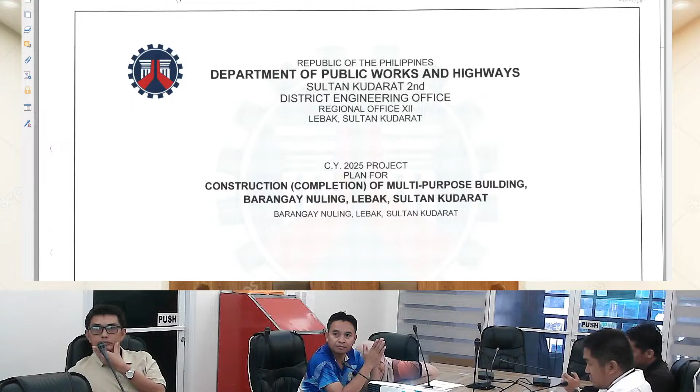First, we have here 25MH0069, with contract name construction completion of multi-purpose building, Barangay Christianuevo, Lebak, Sultan Kudarat, with an ABC of 2,475,000 and duration of 90 calendar days. This project is intended for the SK building of Barangay Christianuevo, a one-story building.

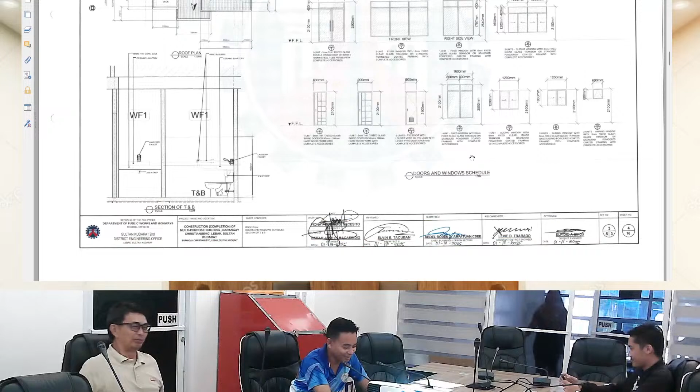As you can see, this is the perspective of our building and its location map. Next, we have here the floor plan, elevations - front, rear, left, and right. We also have the longitudinal section and the cross section through X and Y. Next, we have the roof plan, the detail of our toilet and bath, and the doors and window schedules.

Next, we have here the general construction notes for our guidelines during construction. Next, we have the foundation plan, the detail of our footing to column, wall footing details, beam schedules, roof beam plan, as well as the roof framing plan.

Next, we have here the detail or typical detail of our roof beam, the connections of the roof and column, beam and column, the typical section of beams, detail of concrete seating, detail of splice, canopy, and detail of our stair on fill.

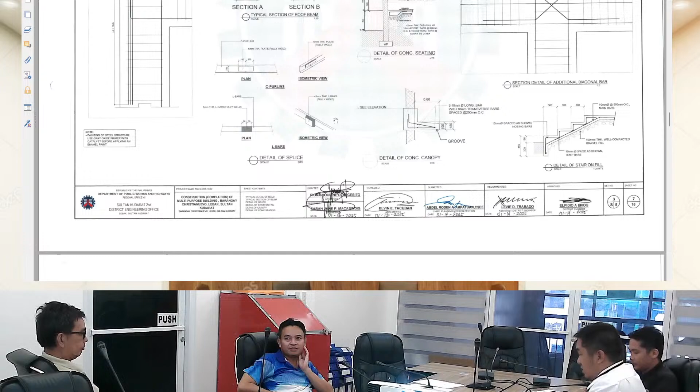Next, we have the detail for our rafter, for our roofing, the typical detail of our slabs, here with its reinforcing steel bar schedules. Next, we have here the detail for our concrete letter signage, which should be anchored to the wall of the building or structures.

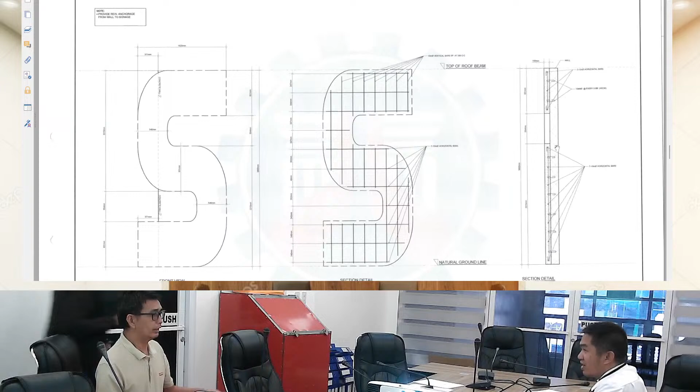Next, we have here for plumbing: the water line layout, sanitary line layout, and waste line layout with its isometric view. Next, we have here the detail of our septic vault and the proper connections of our pipings together with its specifications and legends.

Next, we have here for our electrical: the power and the lighting layout plan, the panel board diagram, electrical riser and load schedules. Next, we have here the detail of our fire extinguishers, the typical detail of our panel board for reference, and the typical detail for our lights and outlets.

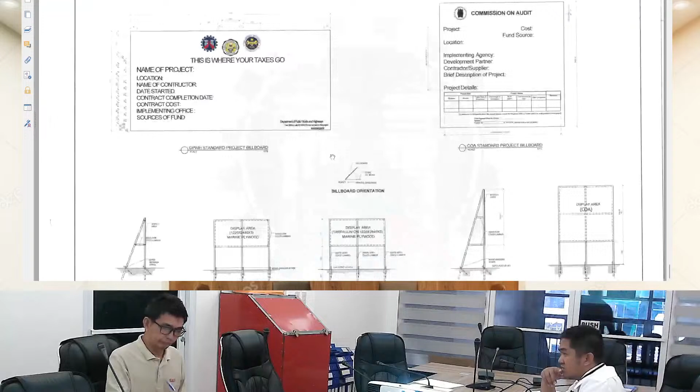Next, we have here the geohazard map. And lastly, we have here the standard project billboard.

The second project is 25MH0074, construction completion of multipurpose building, Barangay Nuling, Lebak, Sultan Kudarat, with an ABC of 2,970,000 and duration of 90 calendar days.

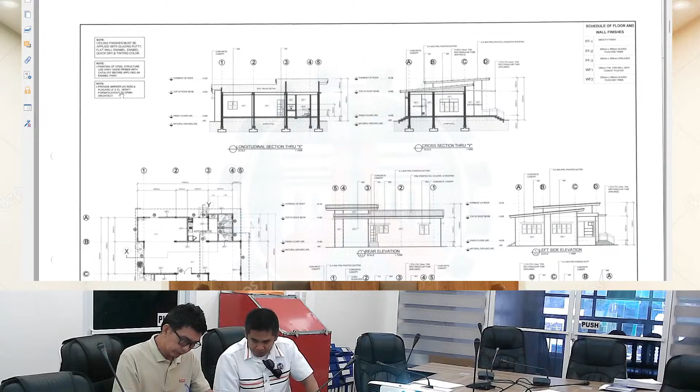This project is intended for the senior citizens, but the structure is the same as the structure of Barangay Christianuevo which I discussed earlier. The difference is the contract amount, and this project includes the painting of the ceiling. Here, it is the same detail as I discussed earlier.

For the summary of quantities for this project, we have the provision of field office for engineers, 3 months; permits and clearances, 1 lump sum; project billboard/signboard, 1 each; occupational safety and health, 1 lump sum; mobilization, demobilization, 1 lump sum; structure excavation, common soil, 33.48 cubic meter.

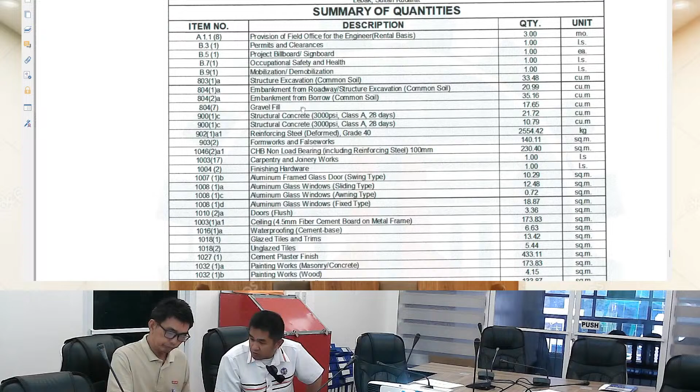Embankment from roadways/structure excavation, common soil, 20.99 cubic meter; embankment from borrow, common soil, 35.16 cubic meter; gravel fill, 17.65 cubic meter; structural concrete, 21.72 cubic meter and 10.79 cubic meter.

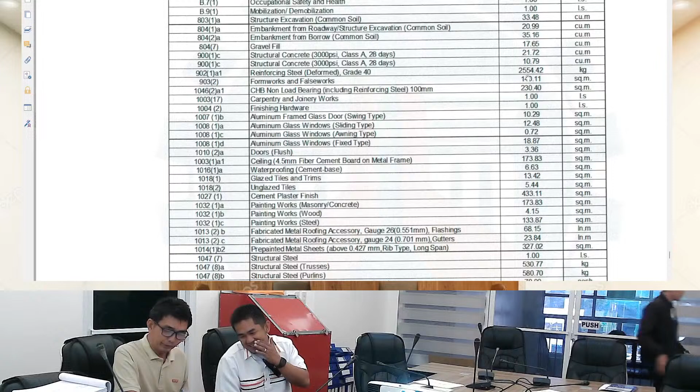Reinforcing steel deformed bars, grade 40, 2,554.42 kilogram. Forms and falsework, 140.11 square meter. CHB non-load bearing, including reinforcing steel, 100mm, 230.40 square meter. Carpentry and joinery works, 1 lump sum.

Finishing hardware, 1 lump sum. Aluminum frame glass door, swing type, 10.29 square meter; sliding type, 12.48 square meter; awning type, 0.72 square meter; and for fixed type, we have 18.87 square meter.

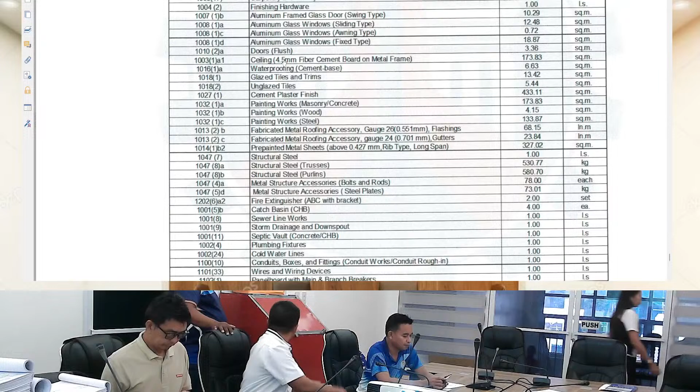We have also here door flush, 3.36 square meter. For ceiling, 173.83 square meter. Waterproofing cement base, 6.63 square meter.

Glazed tiles and trims, 13.42 square meter. Unglazed tiles for our comfort rooms, 5.44 square meter. Cement plaster finish for 433.11 square meter.

For painting works, masonry/concrete, 173.83 square meter. For wood, 4.15 square meter. For steel, 133.87 square meter.

For fabricated metal roofing accessories: flashing, 68.15 linear meter; for gutters, 23.84 linear meter; and for pre-painted metal sheets, rib type long span roofing,

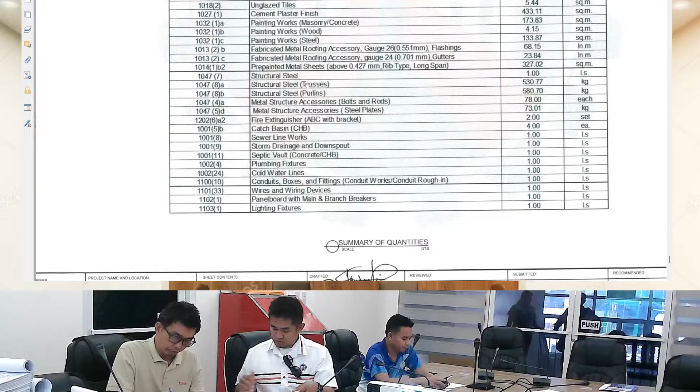327.02 square meter. For structural steel, 1 lump sum. For trusses, 530.77 kilogram. For structural steel purlins, 580.70 kilogram.

For metal structure accessories, bolts and rods, 78 each. Steel plates, 73.01 kilogram. And for fire extinguisher, 2 sets. Catch basins, 4 each. We have also here for plumbing and electrical: catch basins, sewer lines, storm and drainage, and

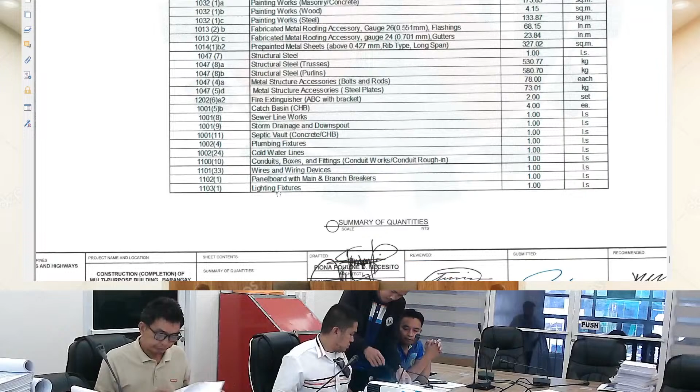downspout, septic vault, plumbing fixtures, cold water lines, conduits, boxes and fittings, wires and wiring devices, panel boards with main and branch breakers, and lastly, lighting fixtures.

Next, we have here the detail of our standard project billboards.

Okay, for our next project, 25 MH 0079, construction completion of multi-purpose building, Barangay Poloy-Poloy, Lebak, Sultan Kudarat, with an ABC of 2,970,000 with a duration of 90 calendar days.

This project is intended for the new barangay hall of Barangay Poloy-Poloy, but it is just phase 1, or for the ground floor only.

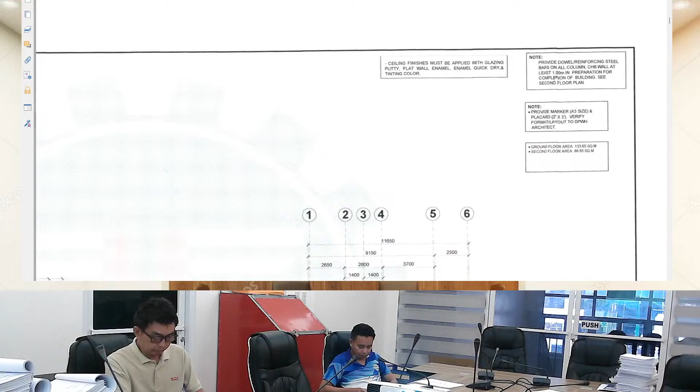Please take note that we have notes in our plans. For example, we have here: provide dowels or reinforcing steel bars on all columns, CHB wall, at least 1 meter, in preparation for the completion of the building. Please refer to the second floor plan for the preparation of the dowels here.

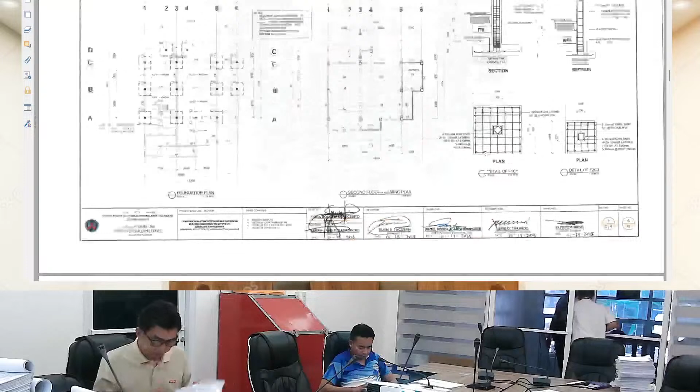Next, we have the foundation plan and the second floor framing plan, or the beam layout. And we have also here the detail of our footing to column, wall footing, and detail of our stair on fill, FTB, and schedule of our column.

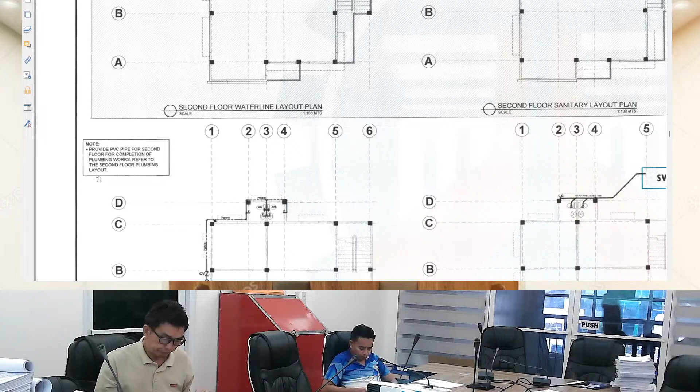And we have also here the second floor, which we need to provide a pipe for the completion of our building, for the second floor plumbing layout.

Next, we have here its isometric view and the detail of our septic vaults, together with the detail or connection of our pipings. Next, we have here for electrical, the ground floor power layout and lighting layout plan.

And we have also here, for second floor, which we need to provide UPVC pipe for second floor in completion, for the completion of the electrical works for the second floor, future expansion or future completion of the building.

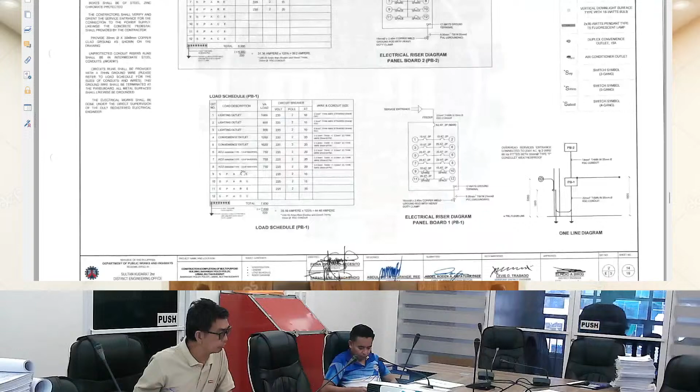Next, we have here the schedule of loads and its riser diagram, and the typical detail of panel boards and the outlet and lightings.

We also have here the layout plan for our fire extinguisher, with its details and schedules.

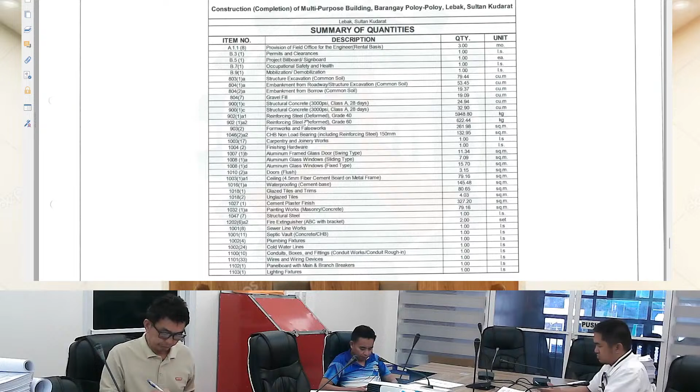Next, for the summary of quantities, we have the provision of field office, permits and clearances, project billboard and signboard, occupational safety and health, mobilization and demobilization, structure excavation for common soil, embankment from roadway/structure excavation, embankment from borrow, gravel fill, structural concrete, and reinforcing steel bars grade 40 and grade 60.

Formworks and falseworks, CHB non-load bearing including reinforcing steel 150mm, carpentry and joinery works, finishing hardwares, aluminum frame glass doors swing type, and aluminum glass windows sliding type and fixed type, flush door, ceiling, waterproofing cement base, glazed tiles and trims, and unglazed tile, cement plaster finish.

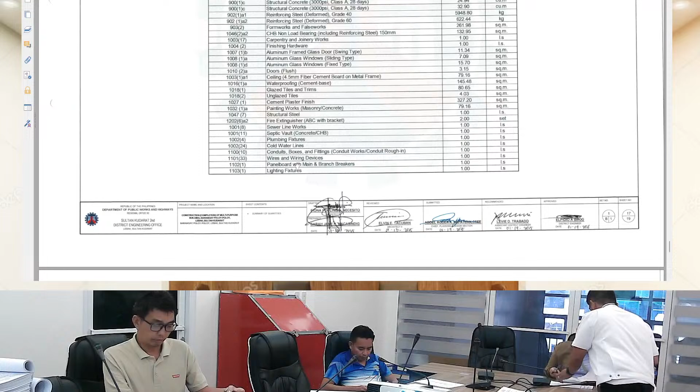Painting works for masonry/concrete, structural steel, fire extinguishers, sewer lines, septic vault, plumbing fixtures, cold water lines, conduits boxes and fittings, wires and wiring devices, panel board with main and branch breakers, and lighting fixtures.

Next, we have here the geohazard map of the municipality of Lebak, and lastly, we have here the standard project billboards.

Next, we have here the project structure, amounting to 4,950,000, with a duration of 120 calendar days each. This project is our 25 MH0082, 25 MH0084, and 25 MH0096. This project is intended for the barangay, a two-story barangay hall.

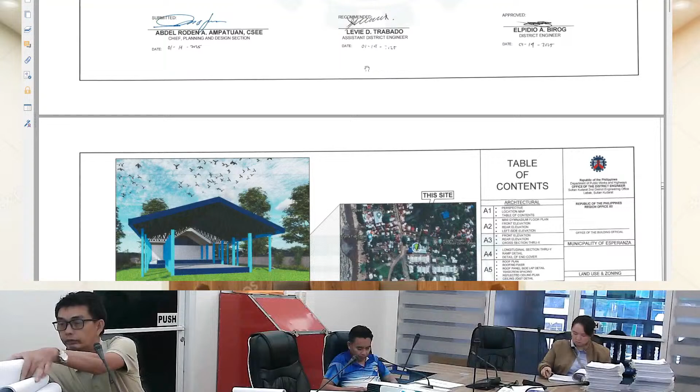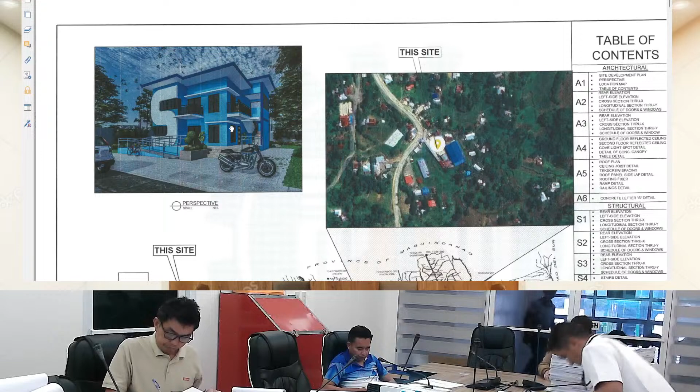This three project has the same structure, but the scope of work has a different summary of quantities. Here, this is the elevation - the front, rear, the front and right elevation, the ground floor plan, and our second floor plan here.

Next, we have the rear elevation, left side, the cross-section and longitudinal sections. And we have also here the schedule of doors and windows. Next, we have the reflected ceiling plan for ground floor and second floor here.

And the detail of the canopy and the cove light detail for our ceiling at the second floor. Next, we have here the roof plan.

Here, the ramp details and the details on the connection of our roofing, the railing details, and the ceiling joist detail.

Next, we have here the detail of our concrete letter signage here, which is anchored to the walls using 10mm reinforcing steel bars. Next, we have here the foundation plan here, the second floor framing, the detail of the FTB wall footing, column, the detail of F1C1, and the detail of our stair on fill.

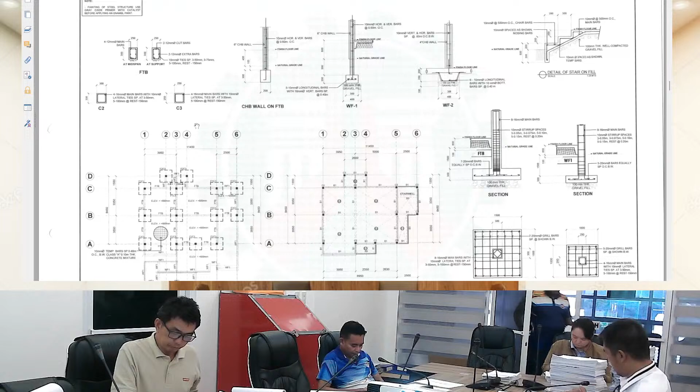Next, we have here the typical detail of our slab and its schedules, the typical detail of beams and columns, and schedule of the beams.

Next, we have here the roof framing plan with the rafter detail and the detail of splice of our purlins and angle bars, and the detail of our gutters and flashings. Next, we have here the detail for our stairs.

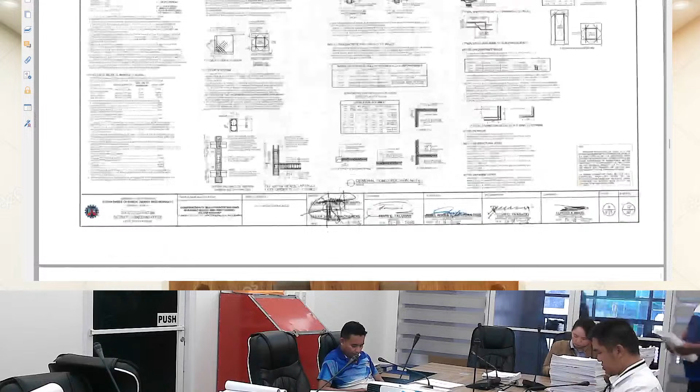The general construction notes, and we have here the water line, sanitary, and drainage layout plan of the ground floor and second floor. And we also have here the isometric views and the detail of the septic vault and its piping connections.

Next, for our electrical, we have here the power layout and the lighting layout plan for the ground floor and second floor, the load schedules, riser diagrams, the typical detail of panel boards and outlets and lights.

Next, we have here the detail of the layout for our fire extinguisher for ground floor and second floor with its fire extinguisher detail and schedules.

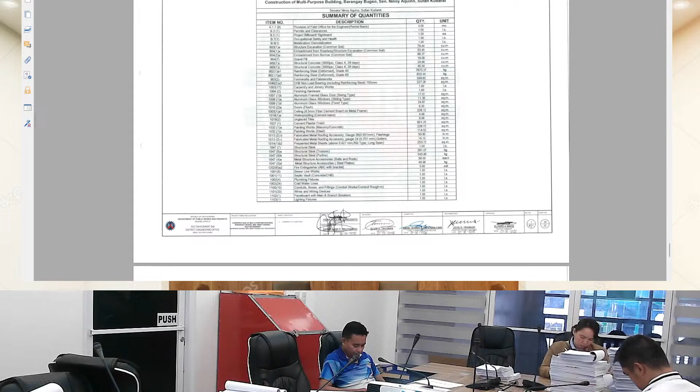Next, for the summary of quantities for the 25 PMH 0082 construction of multi-purpose building, Barangay Salangsang, Lebak, Sultan Kudarat.

We have here the provision of field office, 4 months; permits and clearances, 1 lump sum, which includes the building permits and occupancy; project billboard signboards, 1 each; occupational safety and health, 1 lump sum; mobilization, 1 lump sum; structure excavation common soil.

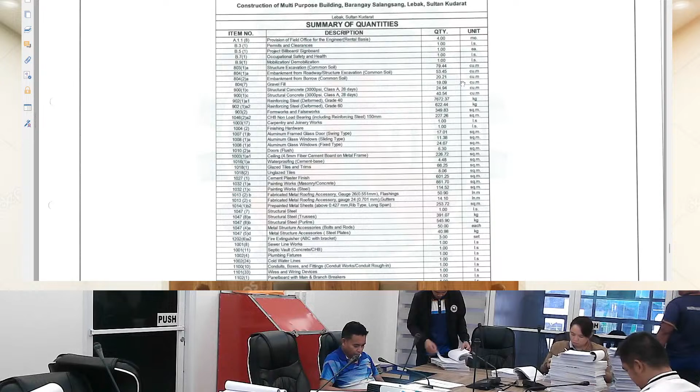79.44 cubic meter, embankment from roadway structure excavation 53.45 cubic meter, embankment from borrow from common soil 20.21 cubic meter, gravel fill 19.09 cubic meter, and for structural concrete.

24.94 cubic meter plus 40.54 cubic meter. For reinforcing steel bars grade 40, 7,672.37 kilogram, and for grade 60, we have 622.44 kilogram.

For formworks, we have 349.83 square meter, and for CHB non-load bearing including reinforcing steel 150, 227.26 square meter. For carpentry and joinery works, 1 lump sum.

Finishing hardware, 1 lump sum. Aluminum frame glass door swing type, 17.01 square meter. For aluminum glass window sliding type, 11.38 square meter, and for fixed type, 24.67 square meter. Flush door, 6.30 square meter.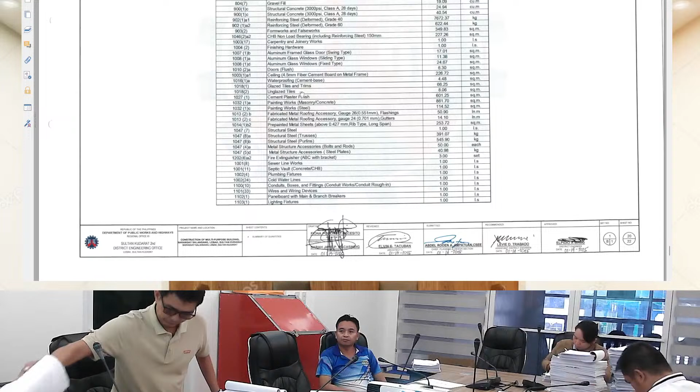For ceiling, we have here 226.72 square meter. For waterproofing cement base, 4.48 square meter. Unglazed tiles, 8.06 square meter. Cement plaster finish, 601.25 square meter.

For painting works, for masonry / concrete, 861.70 square meter. For steel, 114.52 square meter. For fabricated metal roofing accessories, for flashing, we have here 50.90 linear meter. For gutters, 14.10 linear meter.

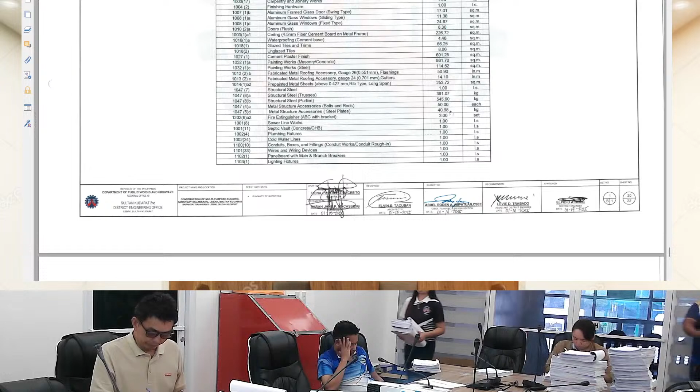Pre-painted metal sheets, rib type long span roofing, 253.72 square meter. Structural steel, 1 lump sum. For structural steel for trusses, 391.07 kilogram. For purlins, 545.90 kilograms. For metal structure accessory, bolts and rods, 50 each. Steel plates, 40.98 kilogram. And we also have here fire extinguisher ABC with bracket, 3 sets.

For plumbing, we have here sewer line work, septic vault, plumbing fixtures, cold water lines. And for electrical, we have here the conduits, boxes and fittings, wire and wire devices, panel board with main and branch breakers, and lighting fixtures.

For the summary of quantity of 25 MA00084, construction of multi-purpose building, Barangay Tagisa, Lebak, Sultan Kudarat, with the same structure as the Barangay Salansang.

We have here the provision of field office for the engineers, permits and clearances, which includes the building permits and occupancy permit, project billboard, signboard, occupational safety and health, mobilization, structure excavation, embankment from roadway / structure excavation, embankment from borrow, gravel fill, structural concrete.

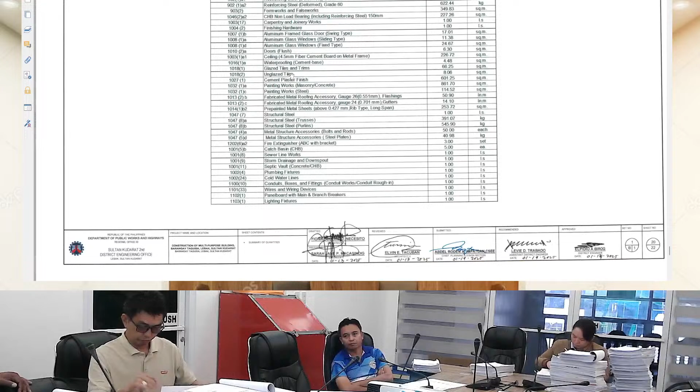Reinforcing steel deformed bars, grade 40 and 60, formworks and false works, CHB, carpentry and joinery works, finishing hardware, aluminum frame glass door, swing type, aluminum glass window, sliding and fixed type, door flush, ceiling, waterproofing, glazed and unglazed tiles, cement plaster finish.

Painting works for masonry / concrete and steel, fabricated metal roofing accessories for flashing and gutters, pre-painted metal sheet of rib type long span roofing, structural steel for trusses and purlins, metal structure accessories such as bolts and rods, and steel plates, fire extinguishers.

And for plumbing works, we have catch basins, sewer lines, storm drainage and downspouts, septic vault, plumbing fixtures, and cold water lines. For electrical, conduits, boxes and fittings, wires and wiring devices, panel boards with main and branch breakers, and lighting fixtures.

And for the 25 MH0096, with the same structures, this is the summary of quantities. For the summary of quantities, you can see the item number, description, quantity, and its units here.

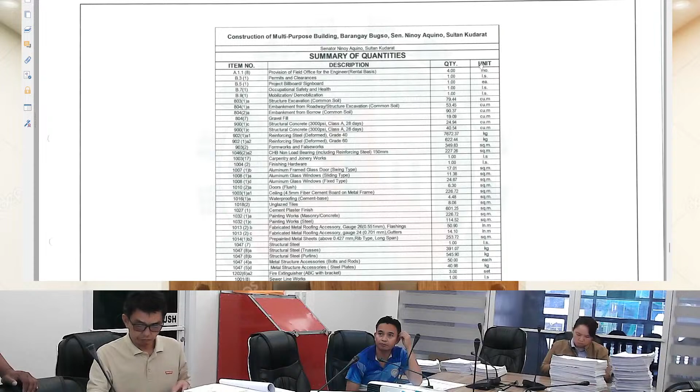For the next project, we have the 25 MH0086, construction completion of multipurpose building, gymnasium, Gistusani Memorial Elementary School, Barangay Tipuan, Lebak, Sultan Kudarat, with an ABC of 3,960,000 with a duration of 120 calendar days.

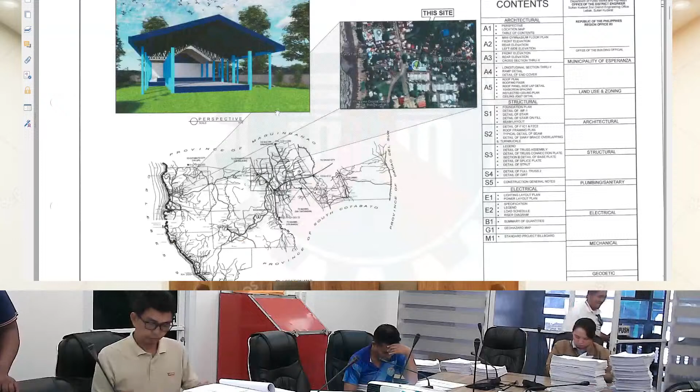This project is intended for the mini gymnasium of the Gistusani Memorial Elementary School. This is the perspective here, as you can see. And we have also here the location map.

This project, or the mini gymnasium, includes the stage and the three span of the main gymnasium here. We have also here the elevation for the left side and the right side, rear and front, and the cross section through X.

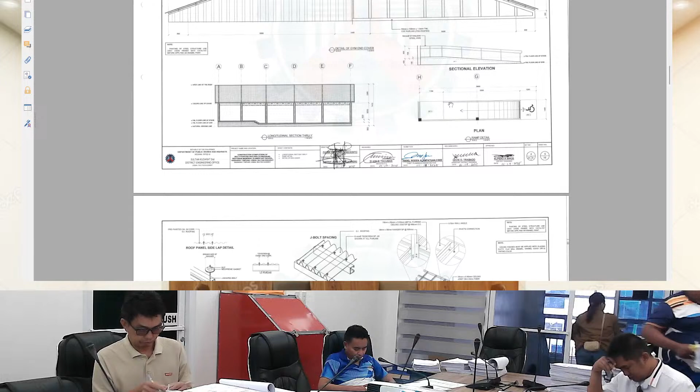Next, we have here the detail of the gym end cover, the longitudinal section and the detail of ramp, together with its sectional elevation. Next, we have here the roof plan and the reflected ceiling plan, together with the roofing connections like roofing fixture, roof panel side lap detail, isometric views, and the ceiling joist detail.

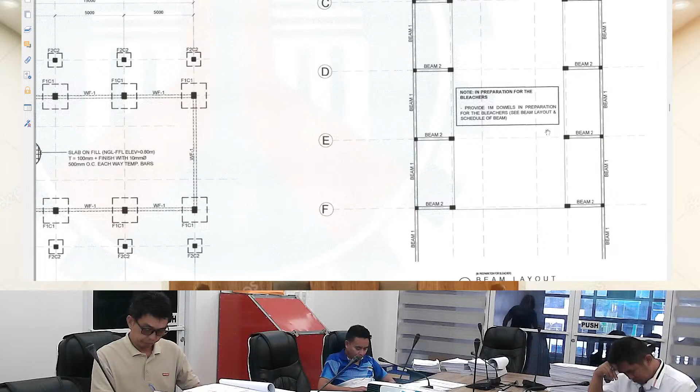Please take note that we need to, for this structure, which includes the stage and the main gym, excluding the bleacher, but we need to provide a 1 meter dowels in preparation for the bleachers. We need to see the beam layout for the completion of the mini gymnasium, which is the bleachers here.

Next, we have the roof framing plan, the typical detail of beam, the detail of our beams, the detail of our footing column detail here.

Next, for our trusses, we have here the detail for our full truss and the detail of the full truss 2, the detail of our girts and the splice detail. We have also here the general construction notes for our construction methods guidelines.

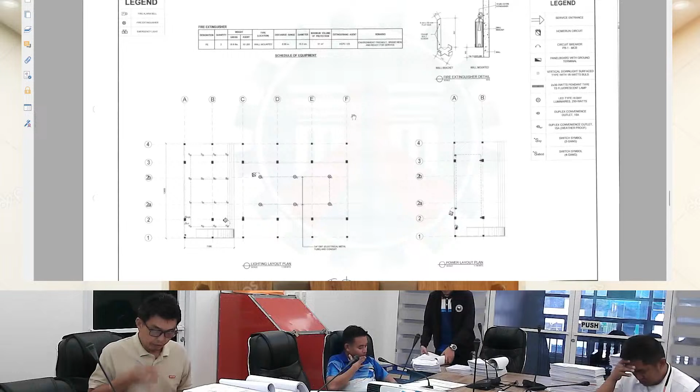Next, for our electrical, we have here the lighting layout and the power layout plan for our gymnasium, which incorporated with the fire extinguisher and its schedule detail here.

Next, we have here the load schedules of our electrical, typical detail of our lights and outlets with its riser diagram. Next, we have here the summary of quantities, the provision, which includes the provision of field office for engineers.

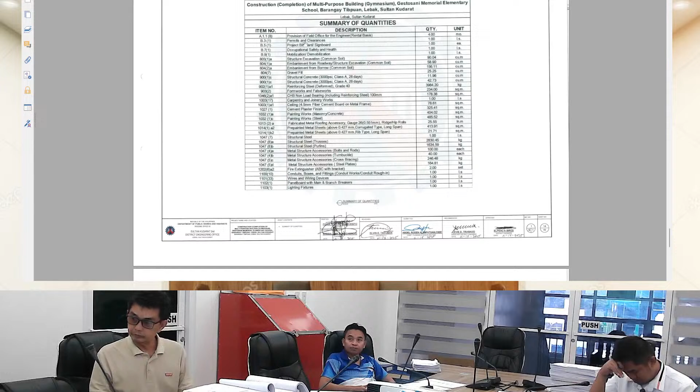Permits and clearances, which includes the building permit and occupancy permit, project billboards, occupational safety, mobilization and demobilization, structure excavation with the quantity of 90.0 cubic, embankment from roadway / structure excavation 58.90 cubic, embankment from borrow, common soil 156.11 cubic, gravel fill 25.25 cubic, for structural concrete 11.96 cubic and 42.73 cubic.

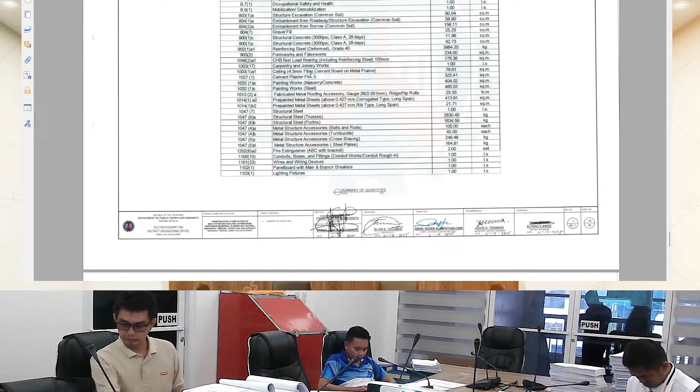For reinforcing steel deformed bars, grade 40, 3,984.20 kilogram. Formworks and falseworks, 234.00 square meter. CHB non-load bearing, including reinforcing steel, 100 mm thick, 178.38 square meter. Carpentry and joinery works, 1 lump sum.

For ceilings, we have 78.61 square meters. Cement plaster finish, 325.41 square meter. Painting works for masonry / concrete, 404.02 square meter. And for steel, we have 485.52 square meter.

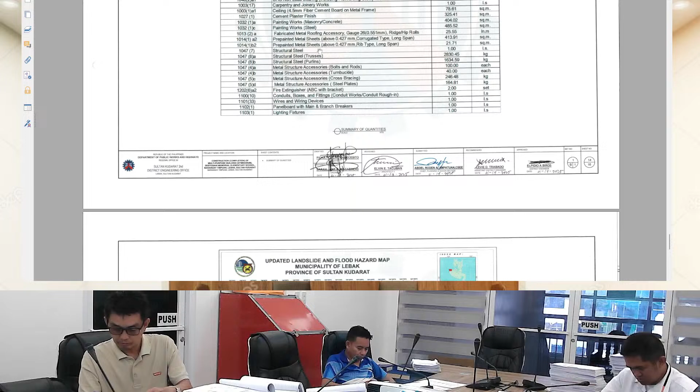For fabricated metal roofing accessories, we have here the ridge / hip rolls, 25.55 linear meter. For pre-painted metal sheets, corrugated type. For our roofing, 413.91 square meter, and for our end cover, rib type long span, 21.71 square meter.

For structural steel, 1 lump sum. For structural trusses, 2,830.45 kilogram. And for purlins, we have 1,634.59 kilogram. For metal structure accessories, for bolts and rods, 100 each. Turnbuckle, 40 each. Cross bracing, 246.48 kilogram. For steel plates, 164.81 kilogram.

We have also here for our fire extinguisher. And for electrical works, we have the conduits, boxes and fittings, wires and wiring devices, panel boards with main and branch breaker, and lastly, the lighting layout fixtures. Next, we have here the geohazard map of Lebak. And lastly, we have the standard project billboard for the project.

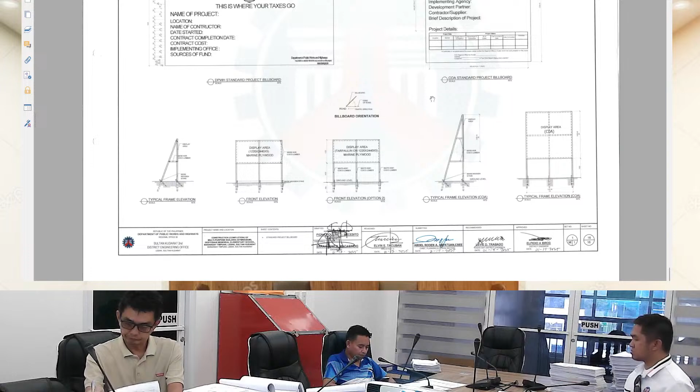Next, we have here the 25M80092. Construction completion of multi-purpose building gymnasium Barangay Kulong-Kulong, Palimbang, Sultan Kudarat with an ABC of 2,970,000 with a duration of 90 calendar days.

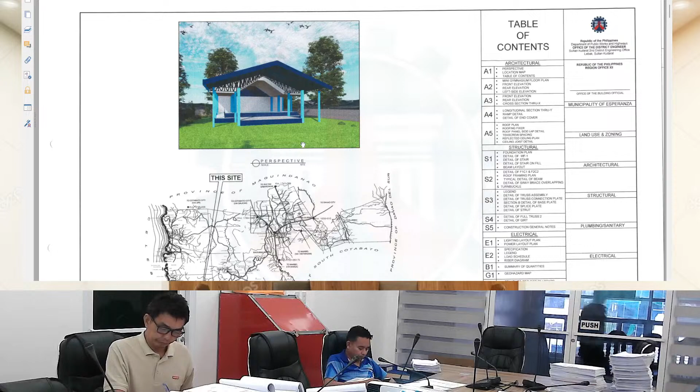This is the same structure as earlier, but the scope of work is the stage and 1 span of the gymnasium. This is the perspective, the location map, and for the floor plan here, we can see the stage and the one span of the gymnasium.

Next, we have here the elevation for left and right, front and rear, and the cross section. Next, we have the detail of end cover, the longitudinal section and detail of ramp, roof plan, reflected ceiling plan, together with detail for the ceiling joists and roofing connections.

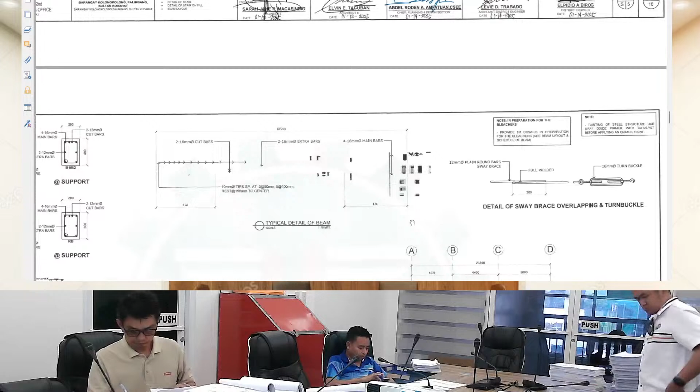Next, we have the foundation plan and beam layout, the detail of stairs and wall footing. For preparation of the bleachers, future completion of the bleachers, we need to provide 1 meter dowel. Here, see the beam layout plan for the future completion of the bleacher. Next, we have here the detail of the roof framing plan and the detail of footing to column.

Detail of beams, typical detail and the typical detail of beams. Next, we have here the detail of our trusses and our triangular strut, and the full truss detail 2, and the detail of wood with the detail splice for the purlins and angle bar.

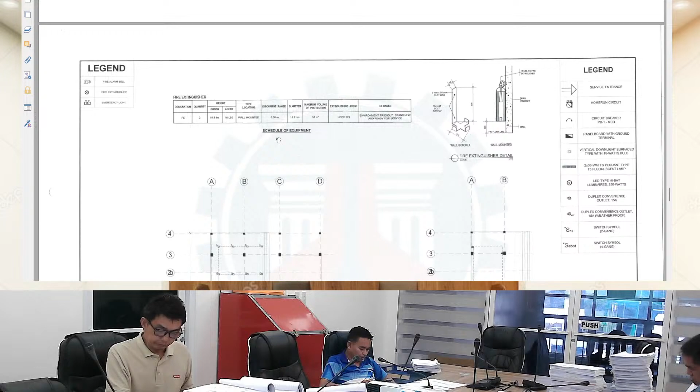Next, we have the construction general notes for our construction method guidelines. And for electrical, we have here the lighting layout plan and the power layout plan, together with the schedule of the fire extinguisher and its detail. Next, we have here the load schedules, typical details of lights and outlets, riser diagram.

And for the next page, we have here the summary of quantities. For this project, the summary of quantities includes provision of field office for the engineers, permits and clearances, project billboard for occupational safety and health, mobilization and demobilization, structure excavation, common soil, embankment from roadway / structure excavation, embankment from borrow, common soil, gravel fill, structural concrete, reinforcing steel deformed grade 40, formworks and falseworks, CHB non-load bearing including reinforcing steel.

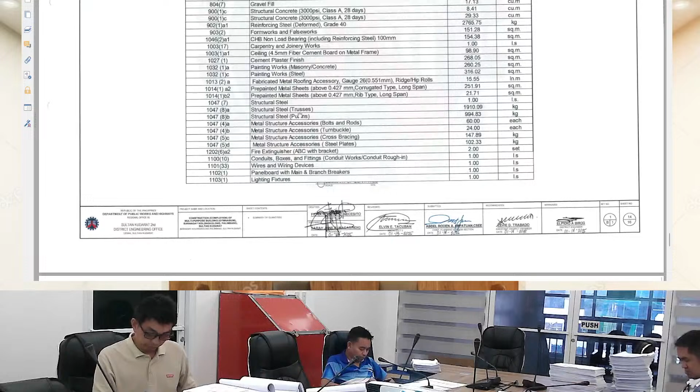100 mm thick, carpentry and joinery works, ceiling, cement plaster finish, painting works for masonry / concrete and for steel. And for fabricated metal roofing accessories, we have the ridge / hip rolls. For pre-painted metal sheet, we have here the corrugated type for our roofing and rib type for our end cover. We have also here the structural steel for other steel structures, and for structural steel for trusses and purlins.

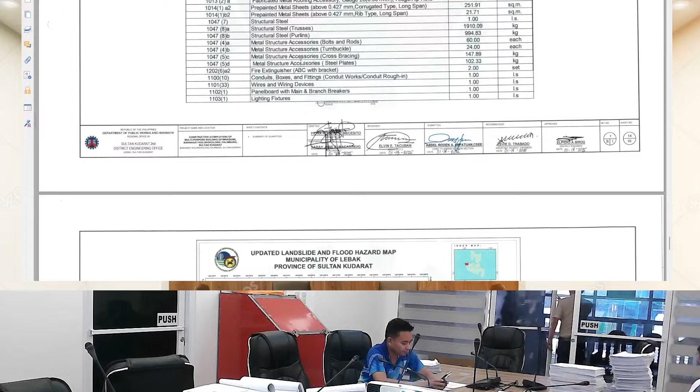For metal structure accessories, we have bolts and rods, turnbuckles, cross bracing, and steel plates. For extinguisher and for our electrical, the conduits, box and fittings, wiring devices, panel board with main and branch breakers, and lighting fixtures. And we have also here the geohazard map and the standard project billboard for the project.

For the next project, we have here the 25M00102, construction completion of multi-purpose building gymnasium, Barangay Lagubang, Senator Ninoy Aquino, Sultan Kudarat, with an ABC of 2,227,500 with a duration of 90 calendar days.

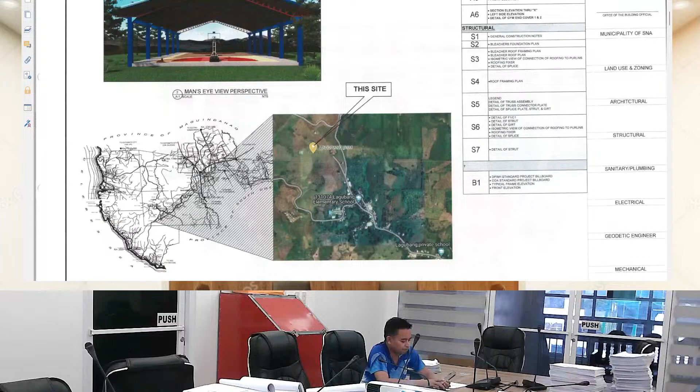This project is the completion of the existing barangay gymnasium of Barangay Lagubang. This is the perspective view and the location map.

For the summary of quantities, we have here provision of field office, 3 months, permits and clearances, project billboards/signboard, occupational safety, mobilization, demobilization. For earthworks, we have the structure excavation, embankment from roadway, structure excavation, embankment from borrow.

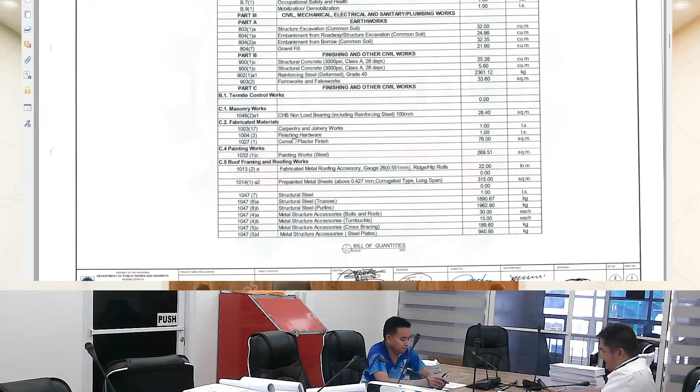Common soil, gravel fill. For finishing and other civil works, we have the structural concrete, reinforcing steel deformed grade 40, and formworks and falseworks, CHB non-load bearing including reinforcing steel 100mm, carpentry and joinery works, finishing hardware, cement plaster finish, painting works for steel.

For our roofing, we have fabricated metal roofing accessories, ridge and saddle hip rolls, pre-painted metal sheet corrugated type, structural steel for trusses and purlins, metal structure accessories, bolts and rods, turnbuckles, cross bracing, and steel plates.

Next, we have here the geohazard map of the municipality of Senator Ninoy Aquino. For this project, as you can see in our floor plan, we have here the existing 3-span gymnasium, and for the completion we added 2-span of the gymnasium here.

Next, we have the elevation view here, side and the sectional elevation, the rear and front elevation, and next we have the general construction notes for construction method guidelines. For foundation plan, we have here...

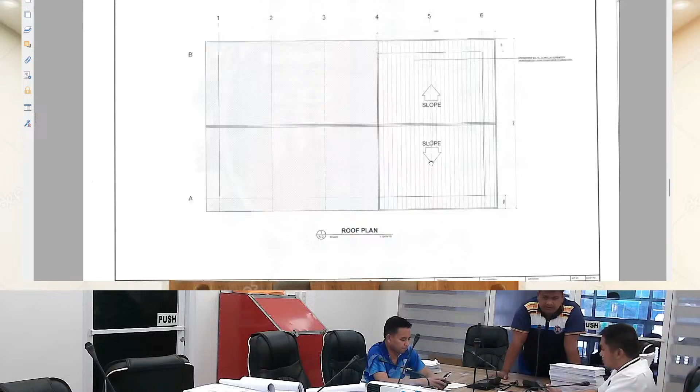Roof plan and the roof framing plan, the detail of our trusses, girt, triangular strut, the detail of our footing to columns, connection of our roofings, detailed splice of our C-purlins and angle bars, and the detail of our wall footing.

And lastly, we have here the standard project billboard for the project.

For the last project, we have here the 25MA00114, construction completion of multipurpose building gymnasium, Pansud Elementary School, Barangay Pansud, Lebak, Sultan Kudarat, with an ABC of 1,980,000 with a duration of 90 calendar days.

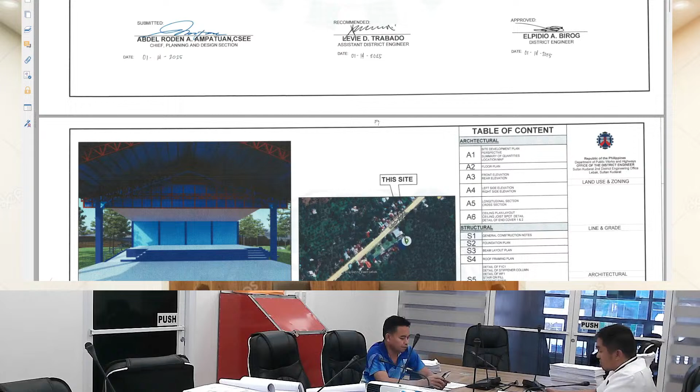This project is intended for the completion of the gymnasium, which prioritizes the stage of the gym here. As you can see, we have here the perspective, the site development plan, and the location map.

This is the floor plan of our project with a dimension of 8 by 15.5, the stage here.

Next, we have here the front and the rear elevations, the right side and left side elevation, the sectional elevation here, the ceiling layout plan, and the detail of the end cover and the typical ceiling joist detail.

Next, we have here the general construction notes for the guidelines of our construction methods. Next, we have here the foundation plan for our stage here.

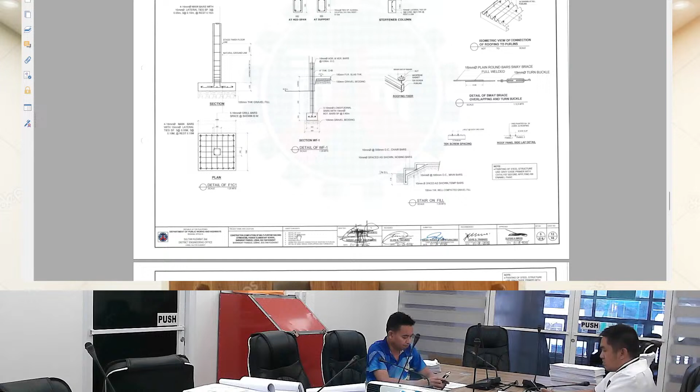Next, we have here the beam layout plan and the roof framing plan. Next, we have here the detail of our F1C1, wall footing, detail or schedules of the roof beams, tie-down columns, stair on fill, and the roofing connections.

We have also here the detail of our rafter, the detail of our girt structure, triangular strut, the detail of splice for our purlins and angle bars, and the connection of the truss and the girt to the existing gymnasium. And here we have the municipality of Lebak's geohazard map.

And for our summary of quantity, we include provision of field office for the engineers, 3 months, permits and clearances for the building permits and occupancy permit, project billboard/signboard, occupational safety and health, mobilization/demobilization, structure excavation, common soil, embankment from roadway/structure excavation, embankment from borrow, gravel fill, structural concrete, reinforcing steel.

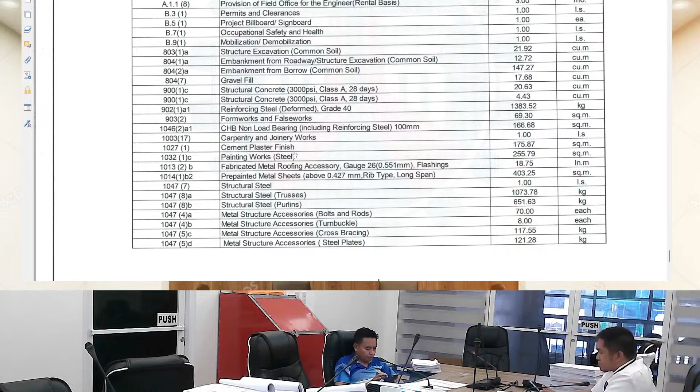Grade 40, formworks and falseworks, CHB non-load bearing including reinforcing steel 100mm thick, carpentry and joinery works, cement plaster finish, painting works for steel, fabricated metal roofing accessories for flashing, pre-painted metal sheet, rib type long span for the roofing of our stage, structural steel for trusses and purlins, and metal structural accessories for bolts and rods, turnbuckles, cross bracing, steel and steel plates.

Next, we have here the standard project billboard.

Please take note that all discussed MPB projects need to provide a marker, which is A3 size, and placard 2 by 3. The layout will be verified by our DPWH architect, which is Architect Elvin Tacuban.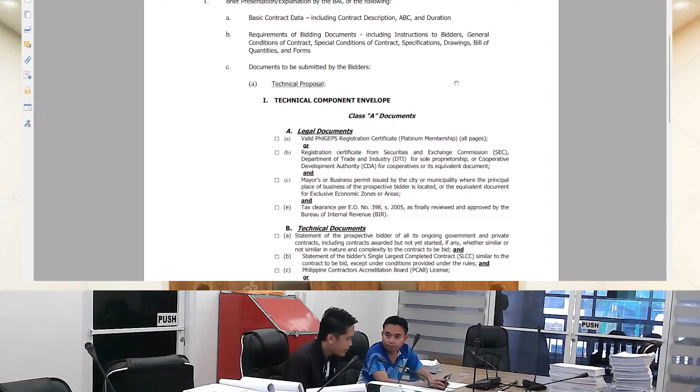For the documents to be submitted, bidders shall follow a two-envelope system: submission of technical proposal and financial proposal. Under technical proposal, the bidder shall submit the following. I will note this technical proposal as our technical component envelope.

Under technical component envelope, the bidder shall submit its legal documents, which are the valid PhilGEPS registration certificate, Platinum membership, all pages. Make sure this certificate is updated, along with its annex attached on the third page. Next, registration certificate from Securities and Exchange Commission, DTI for sole proprietorship, or Cooperative Development Authority for cooperative, or its equivalent document.

Next, mayor's or business permit issued by the city or municipality where the principal place of business of the prospective bidder is located, or the equivalent document for exclusive economic zones or areas. And next is the tax clearance per EO number 398, series of 2005, as finally reviewed and approved by the Bureau of Internal Revenue, BIR.

Take note on these documents mentioned under legal documents. Make sure all of these are reflected in your PhilGEPS certificate and updated.

Next, technical documents: statement of the prospective bidder's ongoing government and private contracts, including contracts awarded but not yet started, if any, whether similar or not similar in nature and complexity to the contract to be bid. Next, statement of the bidder's single largest completed contract, or SLCC, similar to the contract to be bid, except under conditions provided under the rules.

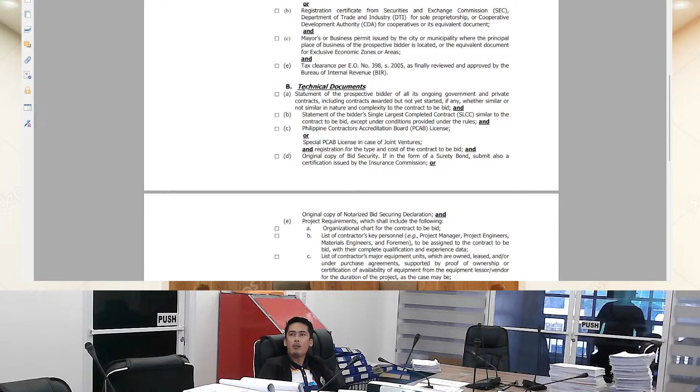Next, original copy of bid security. If in the form of surety bond, submit also a certification issued by the Insurance Commission, or you may use a notarized bid security declaration. Take note, the one attached should be original.

Next, project requirements, which shall include the following: organizational chart for the contract to be bid, list of contractor's key personnel, for example the manager, project engineer, project materials engineer, foreman, to be assigned to the contract to be bid, with their complete qualification and experience data.

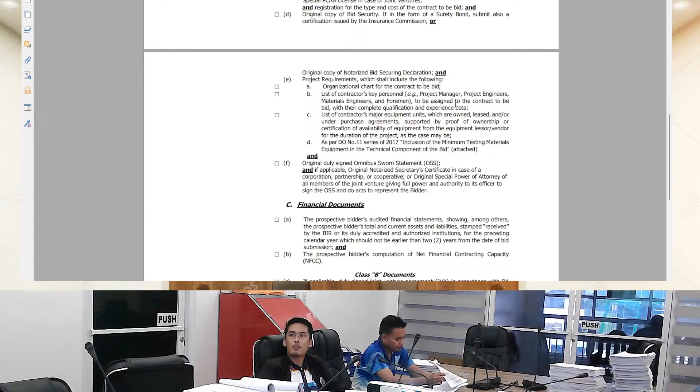When we say complete qualification and experience data, for our project engineers, there is a requirement that they must be accredited and have an issued department order from DPWH for their pledged project engineer. Similarly, materials engineers must have an accredited materials engineer certification.

Next, list of contractor's major equipment units which are owned, leased, and/or under purchase agreements, supported by proof of ownership or certification of availability of equipment from equipment lessor or vendor for the duration of the project, as the case may be.

Take note also that there should be attached requirements pertaining to the list of your major equipment.

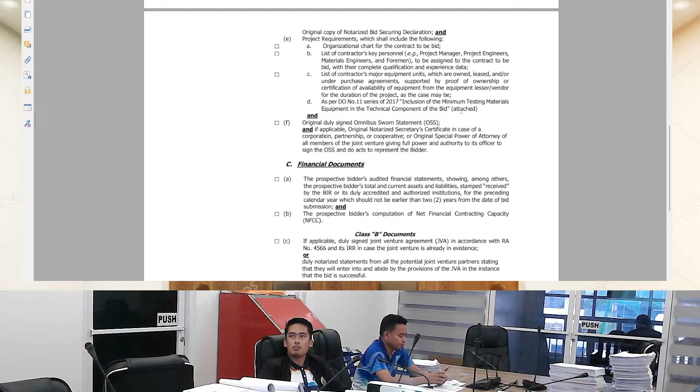Next, as per DO number 11, series of 2017, inclusion of the minimum testing materials equipment in the technical component of the bid. Don't attach the DO itself; what we attach is the certification or any proof that you have the minimum testing materials equipment.

Next, original duly signed Omnibus Sworn Statement, OSS, if applicable; original notarized secretary's certificate in case of a corporation, partnership, or cooperative; or original special power of attorney of all members of the joint venture, giving full power and authority to its officer to sign the OSS and do acts to represent the bidder. Take note on this OSS attachment, make sure it follows the items as prescribed by the GPPB.

Next, still under the technical component envelope, the financial documents, which are the prospective bidder's audited financial statements, showing among others the prospective bidder's total and current assets and liabilities.

Take note of the phrase 'stamp received' by the BIR or its duly accredited and authorized institution, for the preceding calendar year, which should not be earlier than 2 years from the date of bid submission. So, stamp received by the BIR or its duly accredited authorized institution. What is this accredited and authorized institution? That refers to the banks.

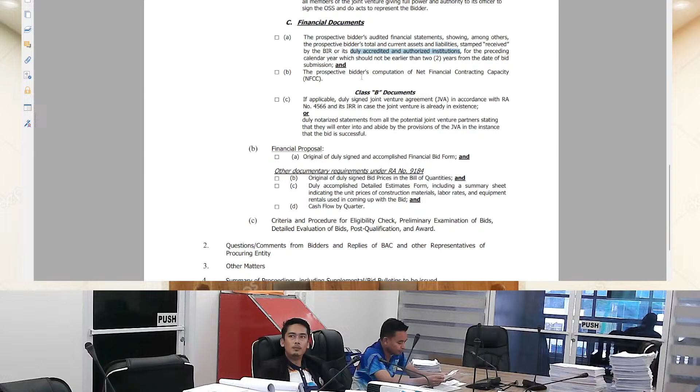Next, the prospective bidder's computation of net financial contracting capacity or NFCC. This should be aligned with our AFS, so make sure it's aligned. Also, our AFS should be updated per our PhilGEPS.

Next, Class B documents. This is where the financial document is included, the Class B document. If applicable, a duly signed joint venture agreement in accordance with RA number 4566 and its IRR, in case the joint venture is already in existence, or duly notarized statements from all potential joint venture partners stating that they will enter into and abide with the provisions of the JVA should the bid be successful. So that comprises your technical proposal.

Next folder is your financial proposal. This only consists of, first, the original duly signed and accomplished financial bid form. Next, other documentary requirements under RA number 9184: the original duly signed bid prices in the bill of quantities, duly accomplished detailed estimates form including a summary sheet indicating the unit prices of construction materials, labor rates, and equipment rentals used in coming up with the bid, and lastly, the cash flow by quarter.

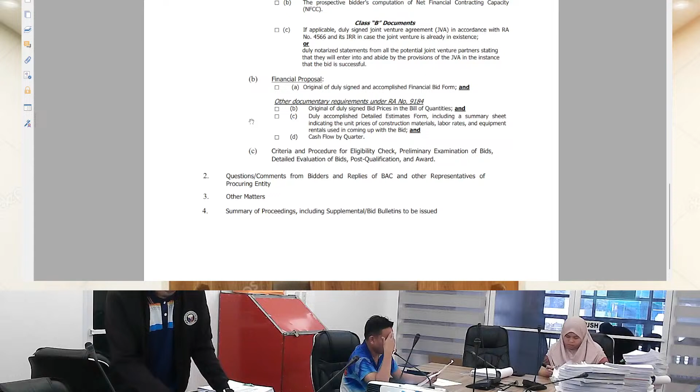So after opening and reading of all the technical and financial proposals of the bidders for all contract IDs to be bid, preliminary examination of all bids will follow. So outright, during the opening of bids, it can be determined immediately who is the lowest bidder. But if you are the lowest bidder, that is not a guarantee that the project will be awarded to you immediately, because the technical working group will conduct the preliminary examination after.

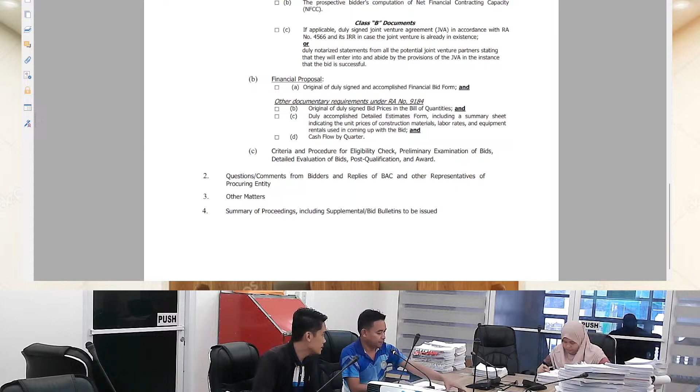Thank you, Sir Alan. Next, we'll proceed to the questions and comments from bidders and replies of BAC and other representatives of the procuring entity. Let's check our live stream. Okay, so far there are no queries.

Let's proceed to other matters. We have some reminders to discuss today. Our bidding documents are available since the date it was posted, January 21 up to February 11, 2025. Our pre-bid is today, January 28, 2025. Our deadline for dropping of bids is on February 11, 2025 at 10 a.m., and the opening of bids will be done after the deadline of dropping of bids at 10 a.m. on February 11, 2025.

We remind bidders who want to join that our bidding documents are available for download at the PhilGEPS website and DPWH website. Check the codes of the contract IDs - that's what you'll use to search for the opportunity on PhilGEPS and the posting on the DPWH website. You may download and print it, and the applicable fee for the bidding documents shall be paid according to the bid documents cost.

We also have it indicated in our posting. You may pay here at our office anytime from 8 a.m. to 5 p.m. on weekdays, and the deadline would be on February 11, 2025. The authorized persons to be catered to by the office are the authorized liaison and the owner only, not other employees of the bidder's firm.

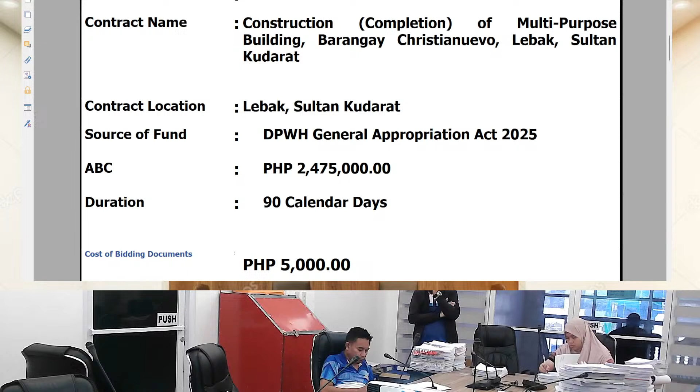Regarding our prepared bids, if you want to have it hardbound, we suggest softbound instead since we will place it in our ISO folder. Make sure all pages are signed with proper pagination numbers, and the pages that need to be signed should have your signature affixed to signify that you have checked that your bids are correct. Also make sure of proper sealing and marking of your bids before dropping them. Thank you.

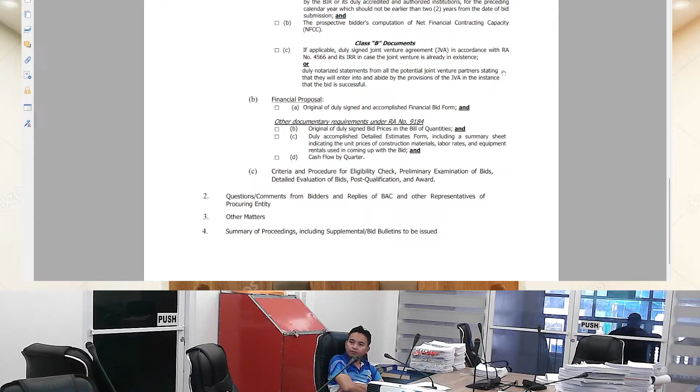Okay, for our summary of proceedings, we have Ms. Yvonne Sumagaysay for the discussion.

Summary of proceedings: The basic contract data, including contract description, ABC, and duration, was discussed by Engineer Sarah Jane Makasindig from the Planning and Design Section. The review of requirements of bidding documents and documents to be submitted by the bidder, both technical and financial components of the bid, was discussed by Mr. Franco Rivalorezo, our BAC secretariat. The criteria for eligibility screening, preliminary examination of bids, detailed evaluation of bids, and post-qualification and award was discussed by Mr. Alan Freno, also one of our BAC secretariat. As per check in the streaming, there is no question from the bidders. The other matters were discussed by Mr. Franco Rivalorezo. Thank you.

Thank you, Ms. Yvonne. So for the conclusion of this pre-bid conference, we'll have Sir Alan, sir.

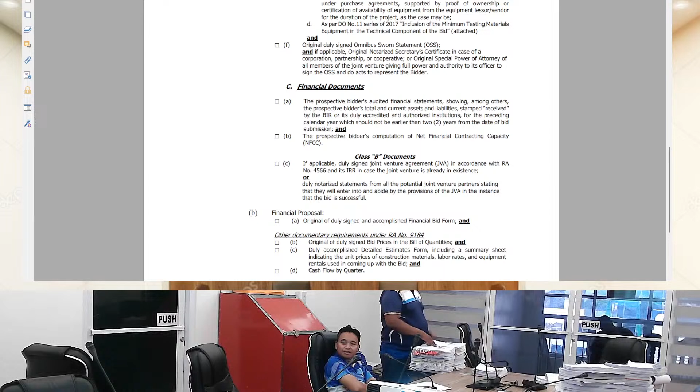Since we have no topics to be discussed and we have finished our agenda, on behalf of our BAC chairman, we declare this pre-bid conference adjourned at 11:34.